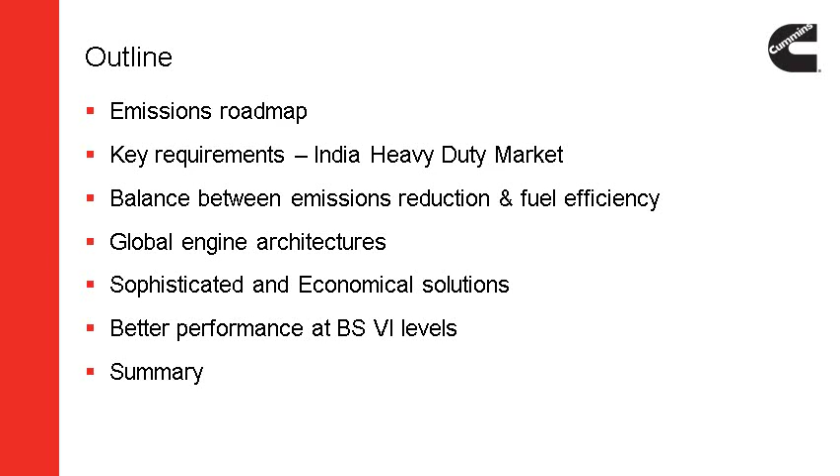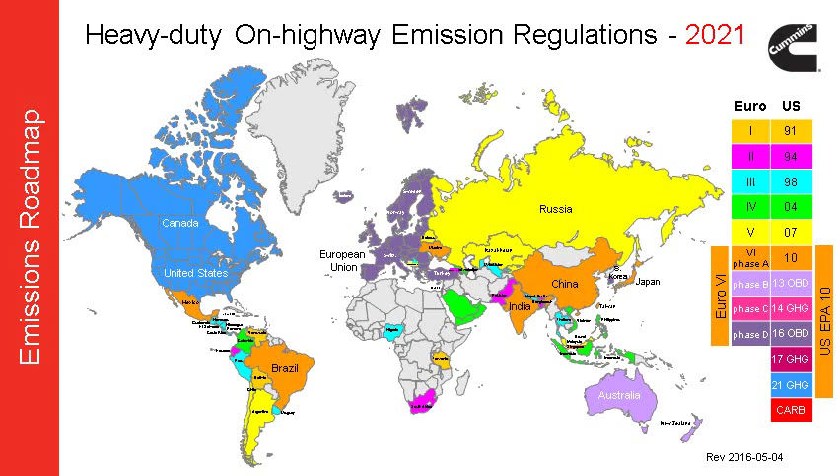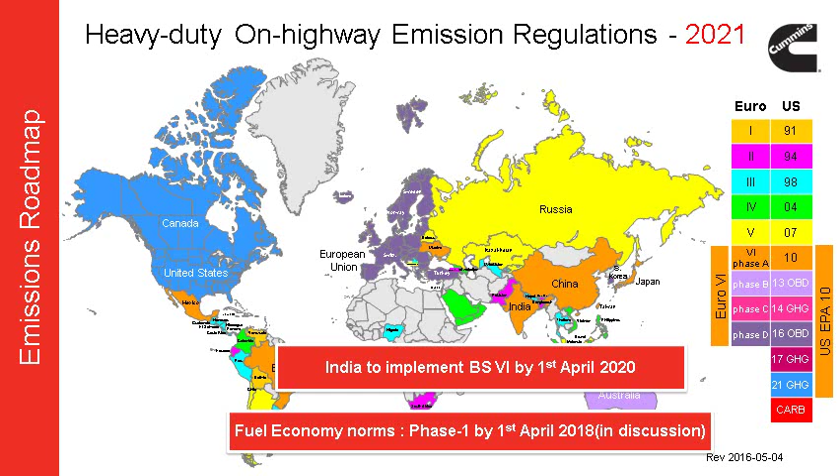This is a slide we all know, just showing that in 2016, today, this is where we are. By 2021, this is where we'll be, with India and China also following BS6 or equivalent - in fact Euro 6 or equivalent. India is to implement BS6 by 2020, and fuel economy norms, now being discussed very seriously, are intended for phase 1 applicability from 2018. That's still in discussion, going back and forth - it will take time because we want to achieve quite a bit. We already know our industries are stressed, since BS6 is coming in after skipping BS5, and there's a lot of development work happening.

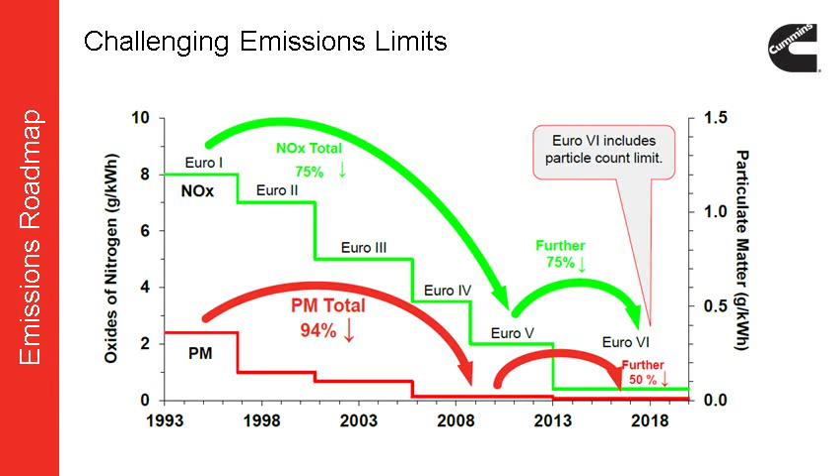Coming to this, what is it that we are looking for? We know all this, we now have our regulations. So what is it that we are looking into? We need a higher fluid economy.

I'm saying fluid because it's almost become a given, just like saying combustion is going to take place in an engine. Everyone talks about SCR, everyone talks about catalyst. We are almost sure that without a catalyst and without EGR, we cannot achieve it.

So higher fluid economy to drive the fleet owner's profitability, of course keeping in mind the consumption, and that would be a major buying criteria.

Then comes reliability, which is equally important. It needs to be reliable, but the fact is even if something breaks down, are we ready for good service? We aren't, because that's another parallel industry which has to develop. As much as we are developing OBD and we have all regulations and norms to meet, if something goes wrong, it's not easy for a mechanic to just come, open your engine and set it right.

There is a lot more to it now, and we have a whole second industry of training and service people. I think it's another parallel thing which we need to do now, and if we don't start it now, we are going to end up in a problem.

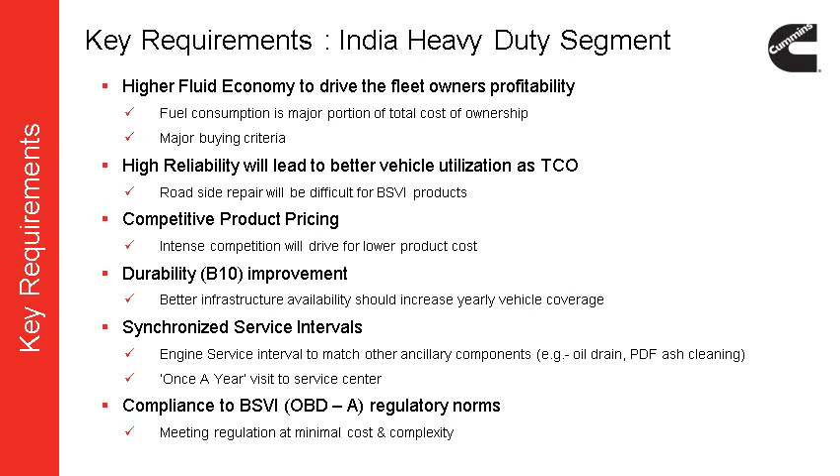Having said this, just like I said, we sort of all know what the engines and what the vehicle is going to have. So I'm looking at the engine part. It has to start with combustion.

I think Dr. Marathe spoke about it yesterday morning. We have to really look at combustion, which we can't avoid. However much we may say we have advanced, there is a lot of work to do there. We need to have a good air handling system and/or EGR.

I have written 'and' here, but I would say 'and/or EGR' here. We need to have very good after-treatment systems, electronic controls, and good fuel systems to enable us achieve what we want to achieve for this combustion. So they are all interrelated. We need all the technologies to be developed simultaneously.

Now, why I say this with so much emphasis is that we have very little time. We really have very little time. 2020 is just round the corner. And for that, if I need - the option is maybe the principles have developed, or we do have in the US, Europe, and other places where some technologies have been developed.

We have to, at this point of time, unless there are some companies who are already ready with it and in anticipation - which are probably very, very few in this country - because we don't have the culture of putting in money on research as much as it is there outside.

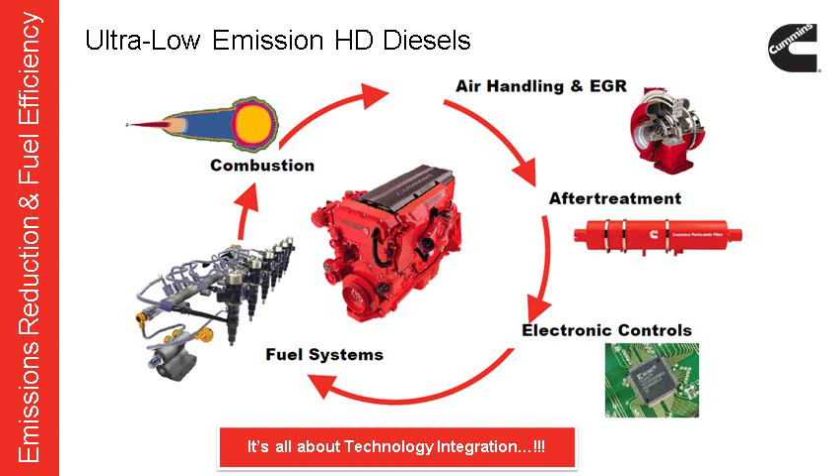Having said this, it has to be an integrated approach. It's all about technology integration at this point of time.

Again, just to re-emphasize the way the evolution has taken place, depending on the type of fuel that we are moving to: we started with aftercooling, then electronic systems, then EGR, then particulate matter, SCR, and then we slowly already started talking about waste heat recovery, because we are also looking at fuel economy, and then telematics and all.

Telematics and others are things which are also - it's not just data processing, it's not just connecting - it is also a lot of safety, it is a lot of maintenance that we talked about. So there is more connectivity required.

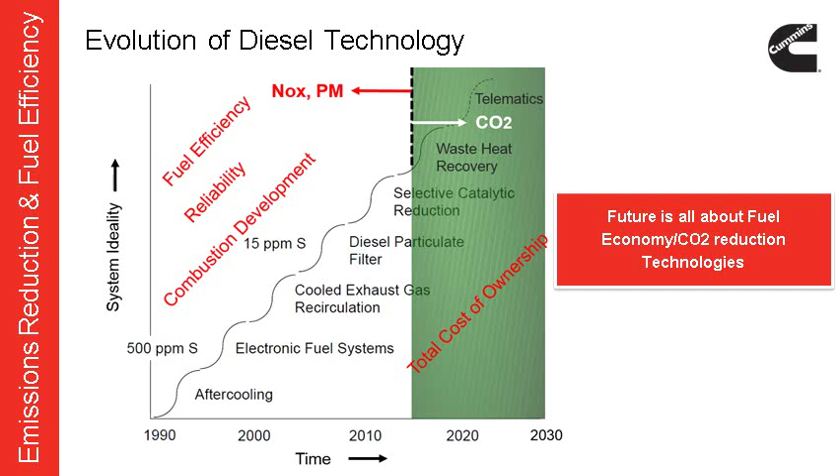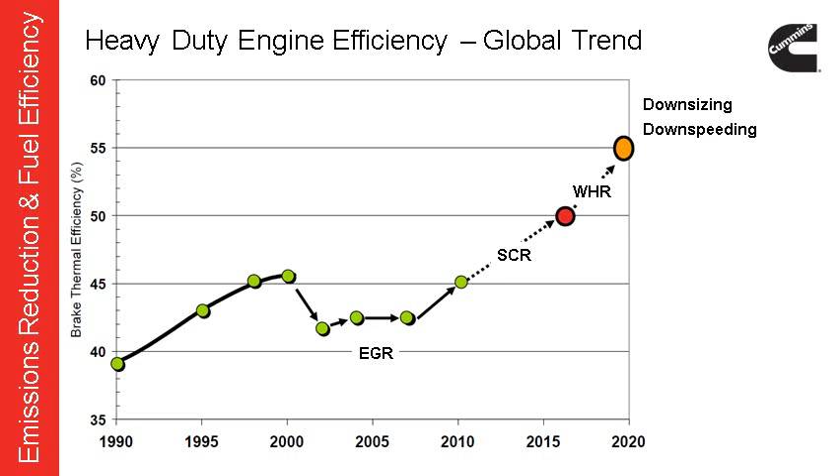I can talk about it for a long time, but I'm going to leave it at that. So we are not considering H2O at this point as an emittant. We are saying CO2, and we are talking about the criteria pollutants. And then came, of course, downsizing and downspeeding - again to take care of driving conditions, the road conditions, the infrastructure conditions in India, and also keeping in mind that now integration with the powertrain also has to come in.

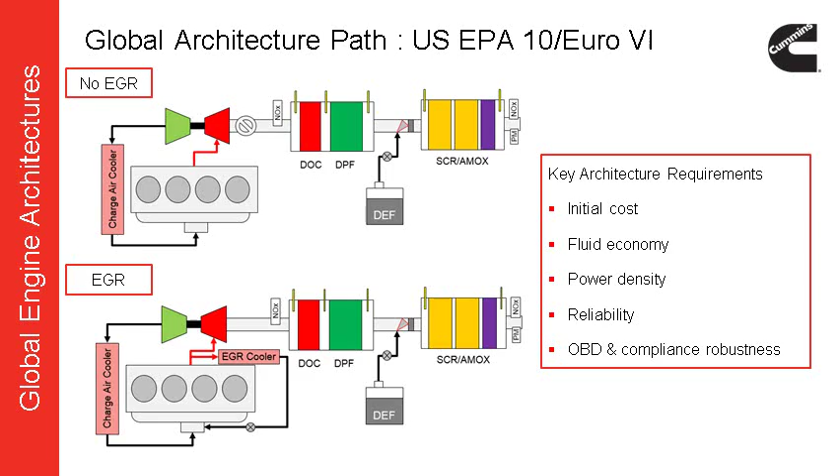If I have an EGR, I have something in between here. I have an EGR cooler, and I make use of this, so that decreases the load on the SCR. I just thought this table might be helpful to quickly go through. I must also tell you that I speak and go very fast on my slides.

So for no EGR, the SCR size, technology, and controller integration are very critical because they could be big. I don't have any support emission strategy, and there's increased DEF consumption, obviously, because this is unsupported by EGR. The OBD becomes challenging, depending on, especially in Indian conditions, which we discussed a lot yesterday, because of low speed and high load conditions. And then I have the PM, which provides an avenue for your precious metals thrifting. Then PN control becomes challenging.

But if I have an EGR system, it's not any less — I have a different set of problems. I have relatively less demand on the SCR, and the optimization is a size optimization, and I have low DEF consumption. For particulate matter it's just vice versa — I need DOC optimization, so that's additional development work there, and I have increased regeneration frequency because my particulate matter will now go up, etc.

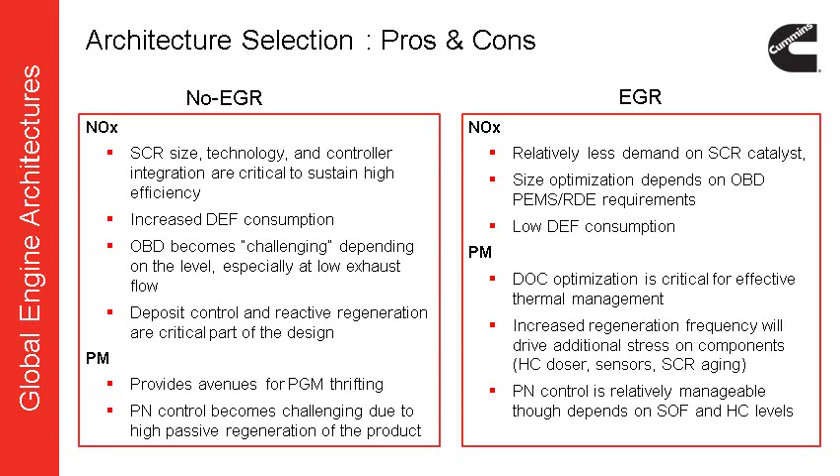Having said this, what's the other thing which is influencing? It's our duty cycle. It isn't anymore just one point, it's not just BSFC, and it isn't at a point — it's a duty cycle.

Now, one of the very challenging questions in India is, do we know the duty cycle? We would say yes, but my fear is we probably don't know how the infrastructure is going to change. We do know that we are going to go into higher speeds — average speeds would be higher, because I see the corridors coming up, and a lot of funding being pumped into infrastructure. So we do see that, but still, looking at the rate at which vehicles are going, the rate at which population is growing, and the rate at which infrastructure is growing...

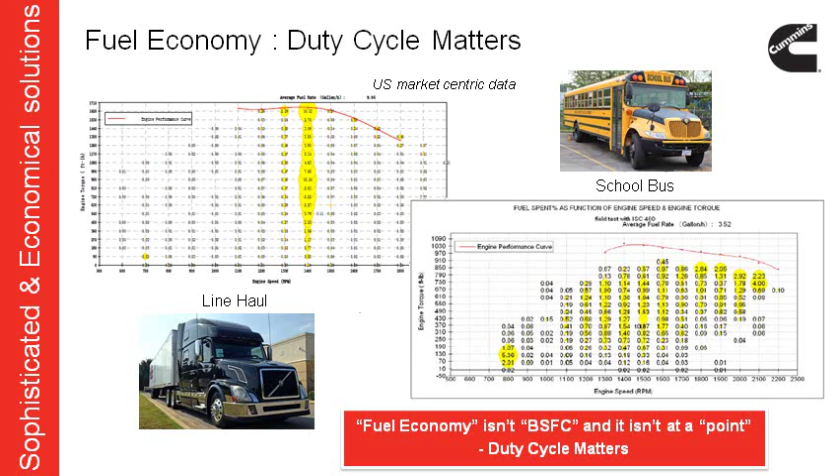And then looking at the uncertainties which we have seen all these years — I know this government is doing things differently, but knowing there is uncertainty, I think it will be a billion-dollar thing to just predict the duty cycle that will be there in 2020 and onwards. It's not just a question of 2020, because there's a lot of conformity required, and there would be a lot of changes in infrastructure. So a lot of work needs to be done with our testing agencies on predictive duty cycles — a lot of predictive modeling is required in this case.

Having said this, let me come to — I'm just going to name these, because it's not going to be very effective if I start describing all of them, but separately, on an academic level, I can talk about it. I'm just trying to list out some of the important technologies which you need to work on, starting from that cycle.

So, advanced combustion and fuel systems — it's very important, as Dr. Marathi spoke yesterday about HCCI and different low temperature combustion. Yes, we have to have a mixed mode of combustion, a lot of work needs to be done on that — early PCCI, maybe, across the torque and speed levels, we need different types of combustion. We also need to have fuel systems which will have higher injection pressures.

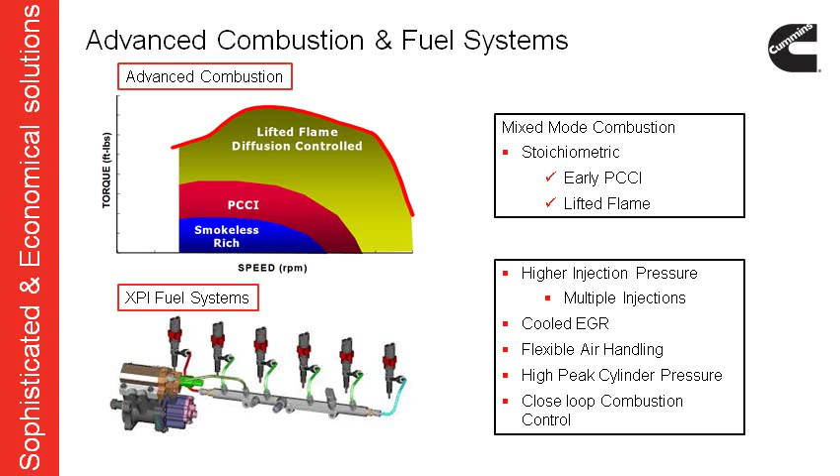If I want to support good combustion, then I need a lot of work to be done on the fuel injectors. Then I need a cooled EGR, a flexible air handling system, and whatever is required to ensure that my combustion is good.

In the after treatment integration, we need to optimize it for performance, reliability, and cost. For example, we have the air intake system along with good combustion, good lubricants—good oil, as someone asked me yesterday. With all that as input, and the air intake, we have good turbos, we have good combustion. Then I have modular exhaust treatment systems which have to be integrated into the whole thing.

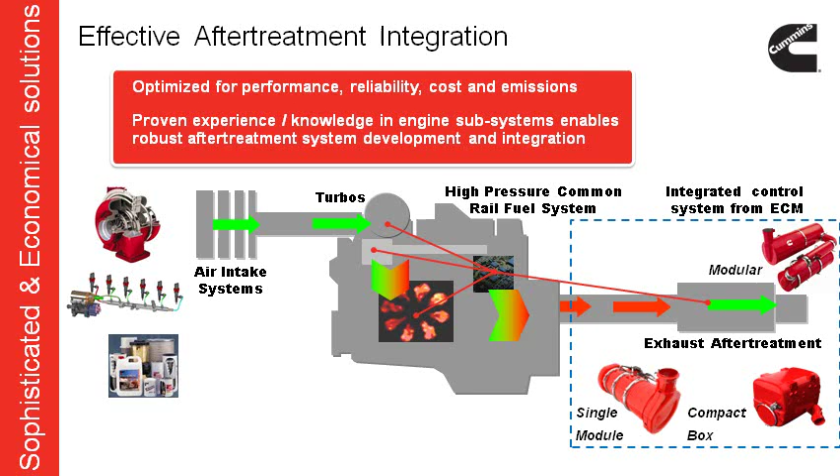For the efficient air handling system, I can talk about dual stage turbocharging, variable geometry turbine—all the technologies are available. What needs to be done is integration, but above all, what needs to be done is low cost. I think if we need to survive here, it needs to be low cost, frugal, yet sophisticated.

The problem is, when we say frugal, it is mistaken with the word jugaad. It should not be. Let's be very clear that frugal or innovation does not mean jugaad.

For those who do not know the meaning of jugaad, I must tell you it's already found a place in the dictionary. Jugaad is a word which I would be happy to translate as frugal or innovation, but the connotation is that it's something where we do a stopgap arrangement.

If there's someone who can help me define this for people who do not know what jugaad is, I'll be very happy. But I think it's something like—again, the word is chalega, it's okay. You just do something to make it work, and it might not be a reliable solution. That's what they say, but actually many of them are very reliable, it's just not sophisticated.

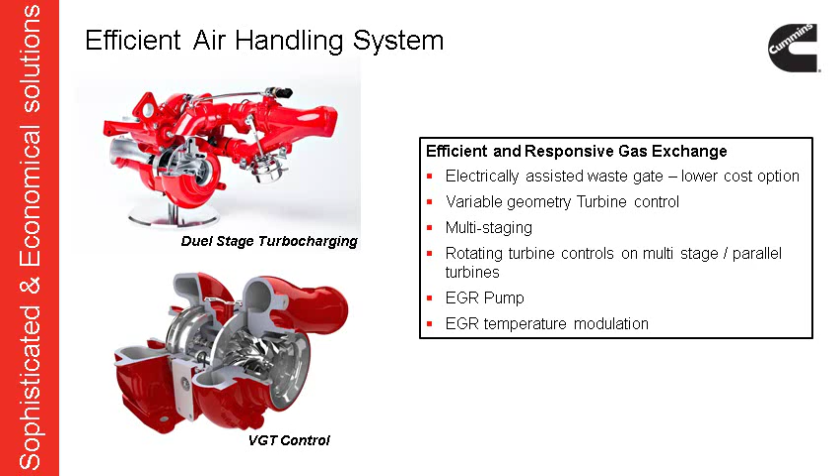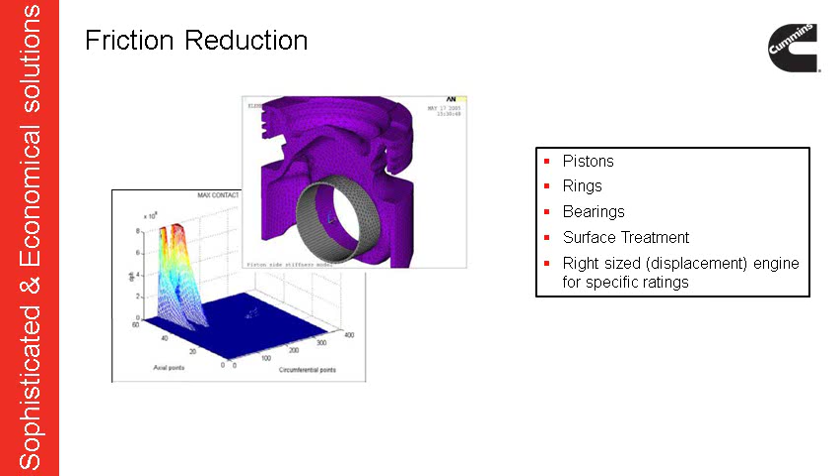Of course, the friction reduction which I talked about—we have talked about pistons, rings, bearings. So it almost looks like you touch every component of the engine. I'm not even talking about the vehicle, I'm talking about the engine and the powertrain.

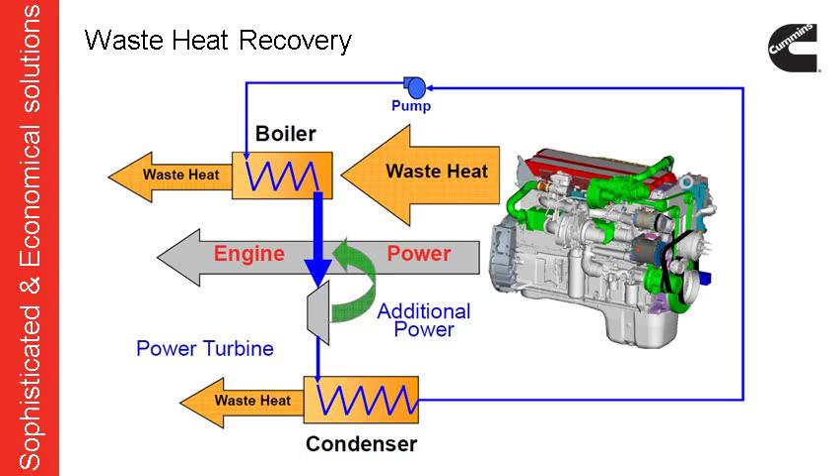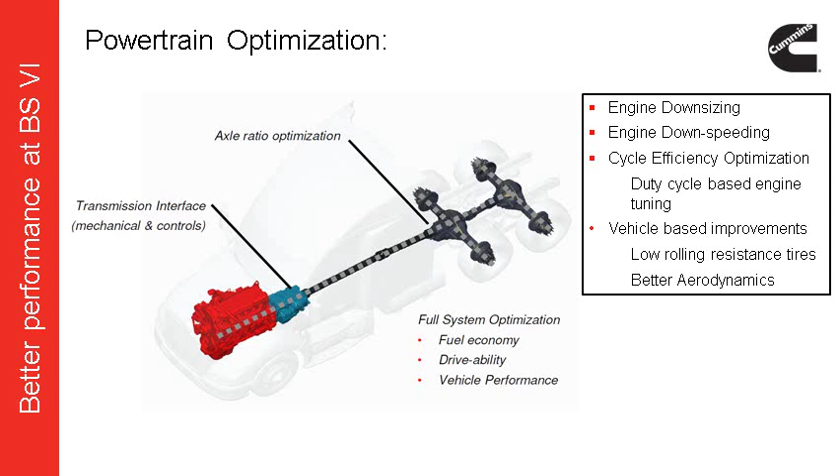The powertrain optimization, of course. Again, I think downsizing and downspeeding are things we need to work on carefully, because we need to know where our capacity and power ranges are going to.

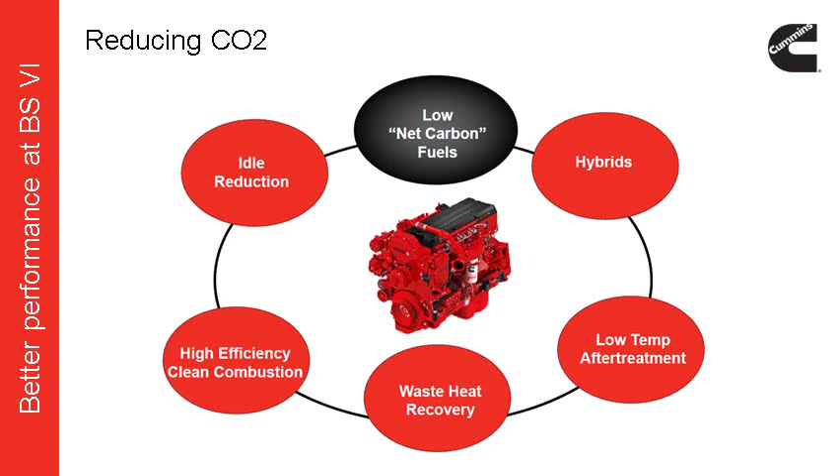Having said this, the other is, of course, reducing CO2. We have to keep that in mind. That means reduction in idle, low net carbon fuels, hybrids, low temperature aftertreatment—all of it put together. And alternate fuels. Now let me tell you what is the key thing that I want to say.

There is a lot of development, this is my perspective, a lot of development which has happened, and because this time is very short, we are all looking into technologies which have already been developed. We are so confident that SCR is required. We are so confident that EGR may be required. We know these are the types of turbines.

But I think this is the time—maybe by 2020 we cannot avoid getting ready. This is the time to look for innovation. This is the time to look for innovation.

I don't know whose quote it was, but if you want to reach somewhere early and walk fast, you need to walk fast alone. But if you need to do some quality work and achieve a goal, you need to walk as a team. Ratan Tata said that, right?

I agree. So that is something I think this is the time when we need to collaborate. When I say we need to collaborate, I know all the companies are competitive, that's fine, but still I think there is some amount of collaboration needed with a lot of support from the government and using our resources.

We have no brain drain today. We have reduced the brain drain to near zero. So it means all that brain power, the resources, are available in the universities. Believe me, I say this because I have seen both sides.

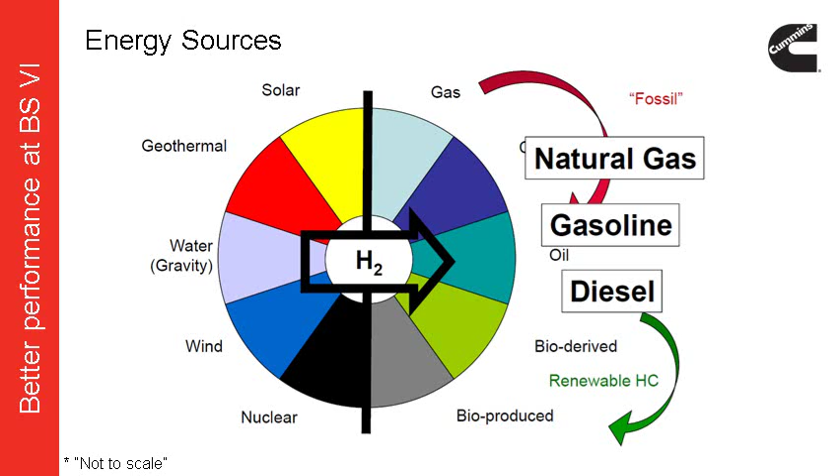Another question here, yeah please. Dr. Ganesh, you spoke about the pros and cons of EGR and no EGR. Which route do you think will be the most...